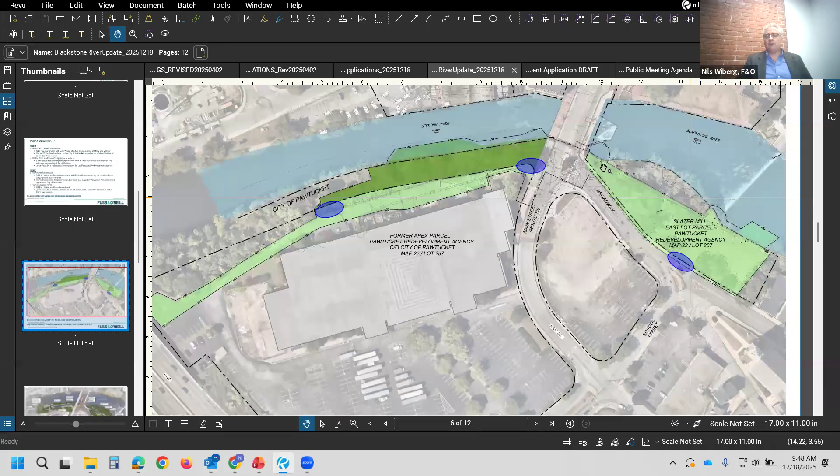The gray parcel of land at the east lot on the river - who owns that? This is actually part of the Slater Mill East lot, but it's not within the limit of disturbance. We're not proposing any activity here, so we're not going to request an easement for access in this area of the site.

Any questions on the easement? This is Kate - is this the entire limit of disturbance we're proposing for the project, or just where the easements are?

This is the entire limit of disturbance. This black line is the actual limit of disturbance line - let me see if I can zoom in.

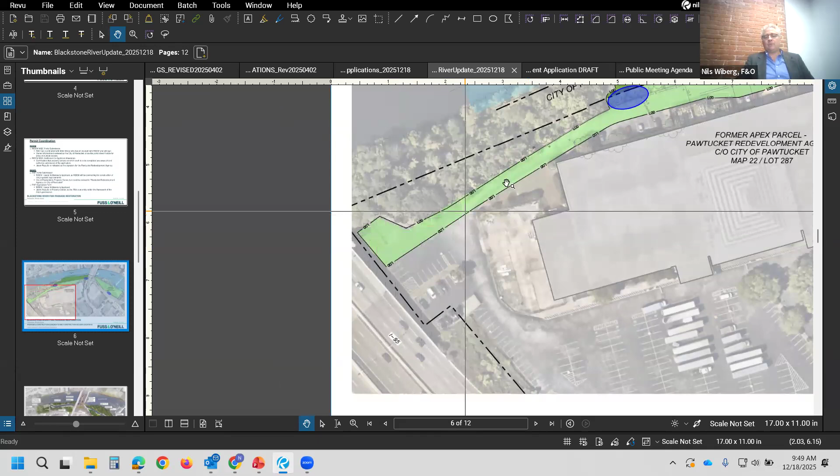PRA was very concerned about the area of the footprint for construction access and staging. We do need an area where we can put a trailer for the contractor and the engineer, in a corridor here. But we really narrowed down the footprint to a very limited area for construction of the fishway. This area is less constrained, but when you get through the fishway, the entire site will be disturbed through the period of construction.

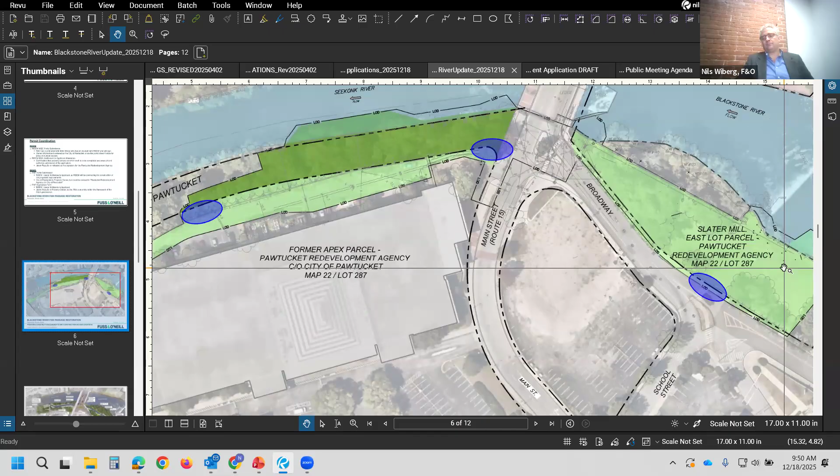How wide is that access from the staging area? I believe it's 30 feet.

Could you do a narrower access if PRA really blocks there? Of course, that's part of the conversation. Their request for proposals has just recently gone out, so they don't have specific plans yet. When they engage with a developer, the developer will have more specific improvements in mind in terms of land areas it would like to make available, vertical structures, other uses, and the timelines for those uses will refine what areas are available and when and how, so we can dovetail and avoid or minimize any potential conflicts with their project's goals.

Their question is, when is your project going to be constructed? We have goals for when it will be constructed based upon when permits will be issued and the availability of funding for construction. But we've indicated to them that probably the earliest construction could begin would be the end of '27, and it would be a 6 to 9 month project to build this infrastructure at minimum.

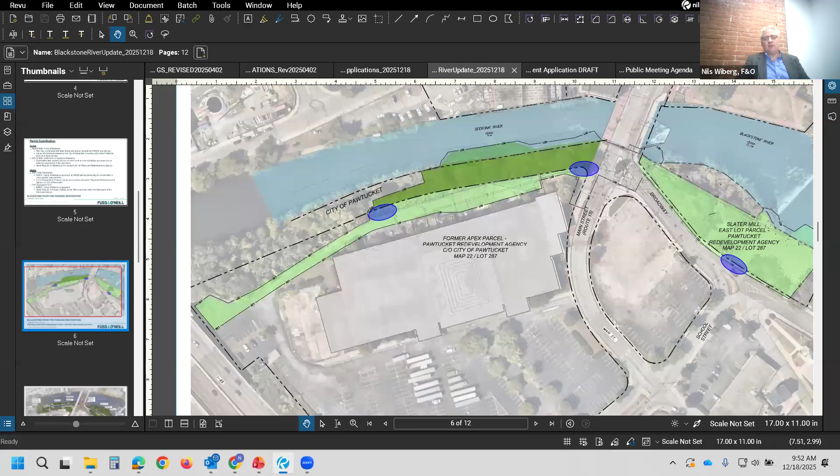We do not - that's not part of our scope of work right now. I believe that TNC may have funding for the purposes of developing these easements. If that's the case, we would go into those particulars and work with Matt and other fisheries staff and Patrick to get more specific about where RIDEM will want access to respective portions of the fishway, where they would get that access, and at what times of year. So I do believe the post-construction O&M footprint for the easement will be smaller and more specific than the construction phase footprint.

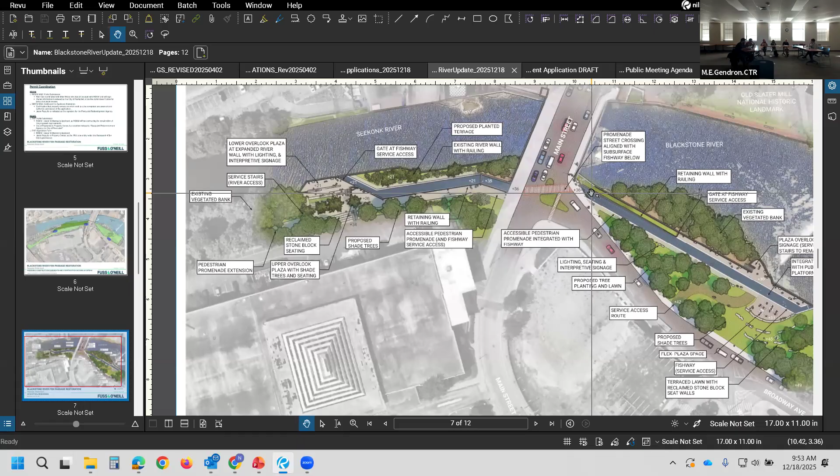So do we have a timeline for requesting those easements? I don't know, John, do you want to speak to what TNC envisions for that, or perhaps Jay? I have no timeline on this - I think we're just continuing to work with PRA and try to get concurrence that these easements will have potential. Jason, do you have any input? No, nothing to add. It's just tough to know right now.

Could that be something we elevate a little bit, so that in January, once PRA knows their contractors, that could be the time where we feel really confident in what we're asking for, so we can make sure that fits in with that work from the beginning?

Sure, if that was to me, maybe I'm misunderstanding. I thought the question was whether we knew when we would start needing these access sites and things like that, but maybe that's not what you meant. I apologize if I misunderstood the question.

I'm just wondering when we can draft, sign, and secure these easements for the project, since I know we can't do it without the easements, and PRA has had the questions of what do you really need in terms of construction, what do you really need in terms of permanent easements. So I know they're reviewing their bids now.

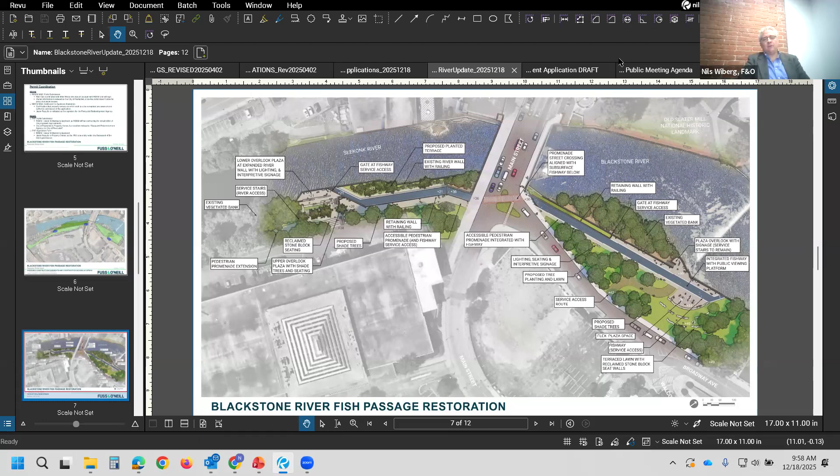Yeah, we can look at reallocating some of the available budget that we can perhaps move to that effort if it becomes a priority. I know, again, we have a budget for the NEPA and Section 106 consultations. If this is something that is a higher priority, then maybe we can shift things there. We also have time here for attendance at these types of meetings, and if we want to try to shift some budget, we can look at doing that.

Certainly want to do everything that we can. And I think there's a certain amount of general sharpening of the pencil to be more specific in an informal sense, but when it comes down to drafting the legal language and the metes and bounds, and having a professional licensed surveyor involved to develop these legal documents, that's something we'd need to look at more closely to see what the level of effort would be and who those professionals and legal advisors would be, to allow us to provide something that could eventually be executed and filed with the town's property records.

So once the dust settles and we get this coming into the new year, the permits are submitted, we'll kind of look and see where we are. And John, we'll set up a meeting with you and Scott and Jason to kind of reorient where we want to focus our resources.

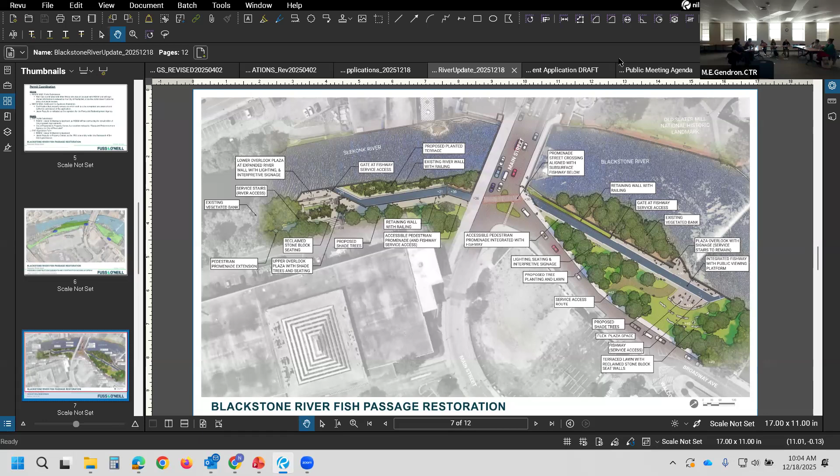To the permanent easement, based upon the graphics we've been showing them, it's almost implied - this is where we want to walk, this is where we want to move. I just wouldn't make that assumption. Let's draw a line around it instead of implying it, explicitly stated. Well, this is the line that's been drawn, so I don't think there's anything ambiguous about this graphic in terms of where the limit of work is and where we want to be on each of these properties.

But certainly having those meetings and answering those questions and continuing the process is very important, so I think we can all agree on that.

And then also a point for today's meeting about signing the application forms: just be clear to them that you're asking for permission to apply for a permit. They're not signing a permit, it's just a permit application. Because sometimes people hear permit and they think permission. True, fair.

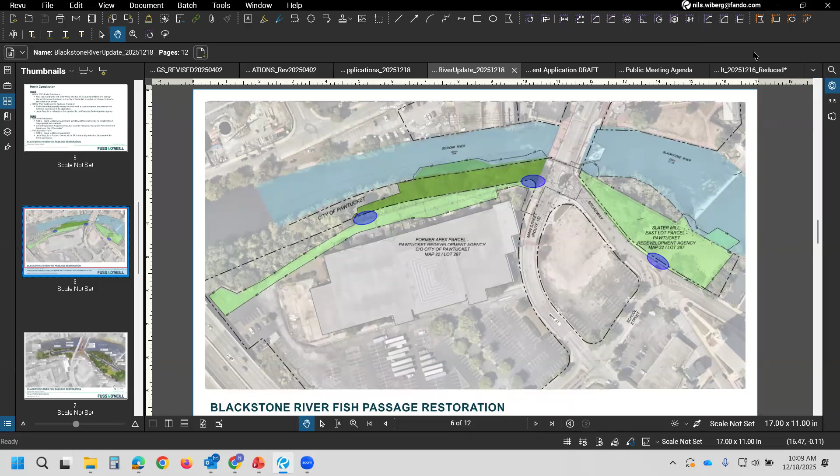I don't know if that meeting happened yet, Jason. Yeah, I can definitely update on that. I didn't know if Sean wanted to offer anything first on the alternatives - there might not be an update there, but anything from you first, Sean?

I don't know, Nils. If you want to jump in, but yeah, I was gonna just put it up on screen. Sorry to interrupt. You and I talked about getting this up, and we can just kind of give an update if that's where you'd like to start, Jason.

Do you want me to pull it open? I got it up right now. Okay, yeah, that sounds good. We can touch on your meeting with Mr. Yip after this.

This is work Sean and Katie have done over the last couple months on the materials and analyses. I wanted to do a page turn here. This report is still being reviewed by PNC and RIDOT, so we'll work with them over the next couple weeks into early January. Then we'll provide a copy for wider distribution to allow others to review, ask questions, and provide input before the report is wrapped up. We have a schedule to complete this report by mid-January.

So we'll want to think about when to re-engage in that second week of January for additional meetings, review and discussion. For purposes of the analyses Sean noted - the considerations, the criteria, the hydraulics governing the 9 alternatives from the last meeting - I think everything in the report falls in line with those. We're just further elucidating the considerations and factors that guide what is being recommended as the preferred alternative.

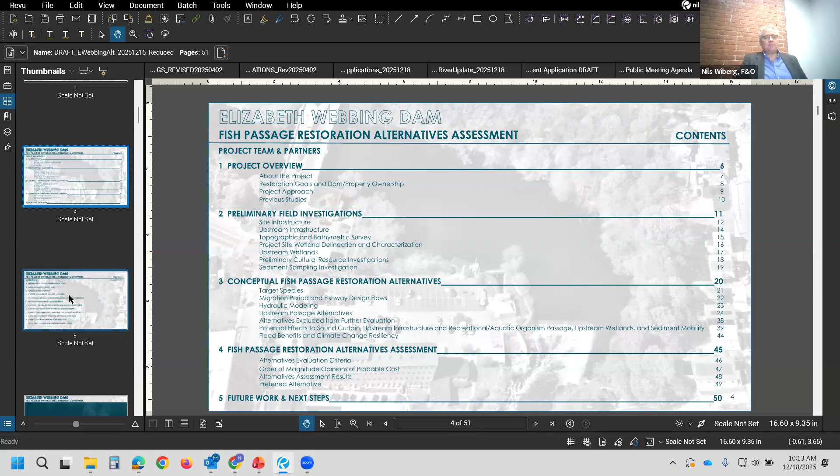That sets the framework and foundation for the evaluations of the different alternatives between the target species, the hydraulics, and where other considerations come in. I'll take a page turn here over the next 5 or 10 minutes, and if folks have questions, let us know. There are additional materials as attachments - this is set up as a graphical report to make it more accessible to...

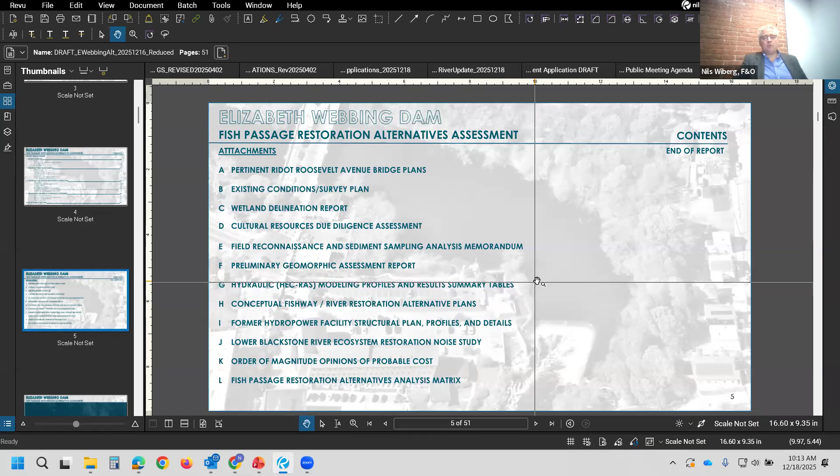Can I interrupt you for one second? Sorry. Can you make your screen presentation mode so it's a little bit bigger for us, please? Let me make it full screen.

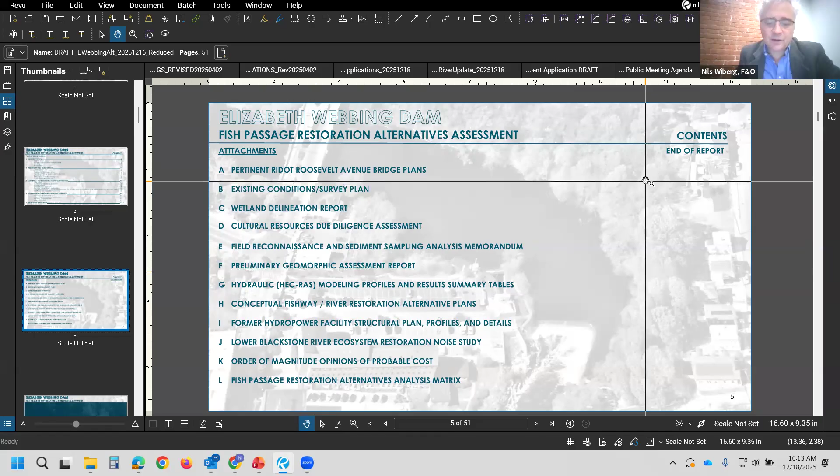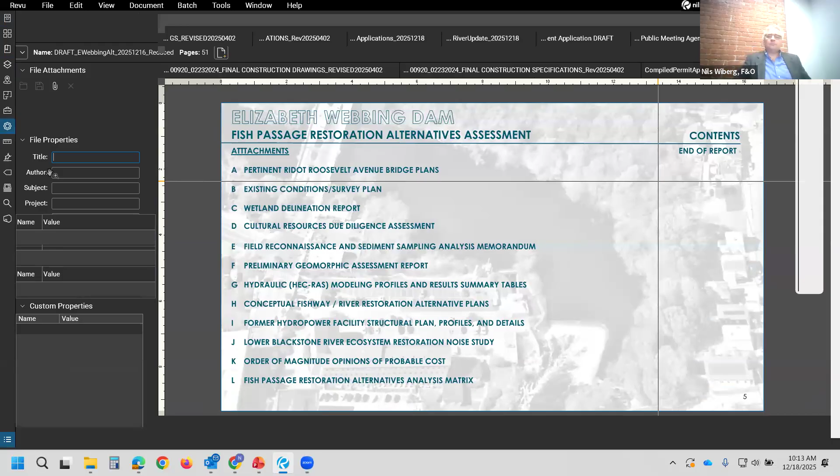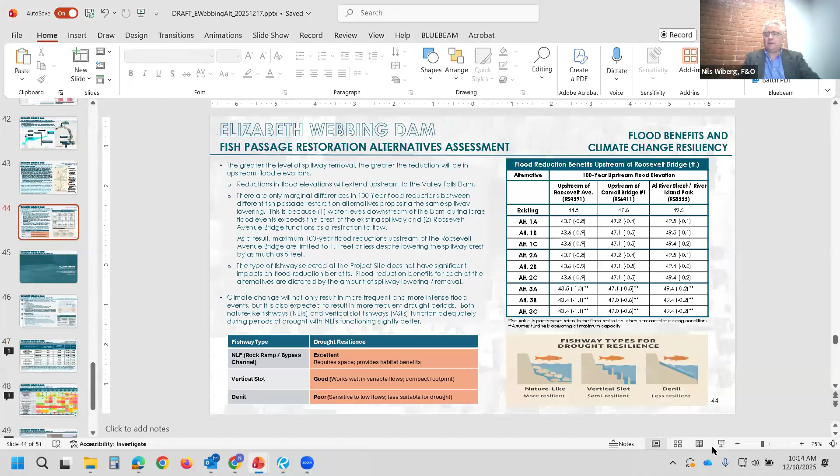You see it, press F11. I'm gonna make sure I don't... Sorry, I forget it's a different program, so it's not as easy as just pressing present. You know what, I actually have it up on PowerPoint here, so I'll just go into presentation mode. All right, let me do that now - that'll be a little bit easier. Thank you so much.

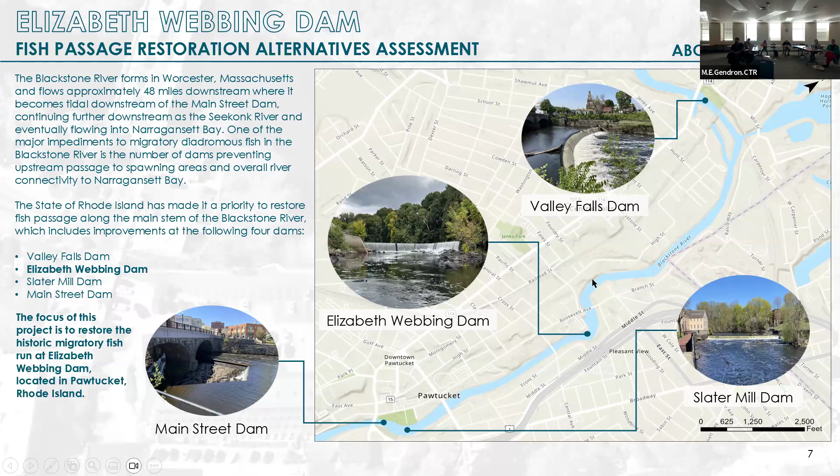Sean, you've done all the work putting this together, but if there's anything we see that we want to clarify, by all means. This identifies where the four dams on the river are - the goal and focus of this project - the Elizabeth Webbing Dam, the FERC facility here at the project site, and the goals for restoration of the river itself.

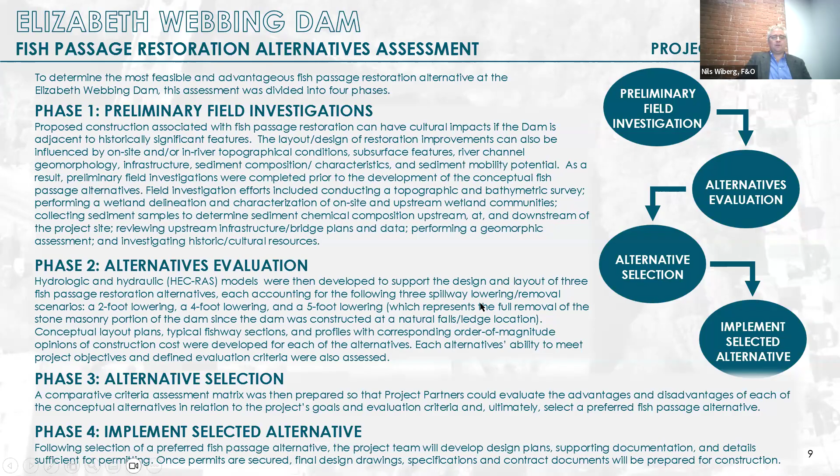The phasing of the project being implemented right now, with the future phase 4 being to implement and permit the preferred alternative. Looking at some previous assessments completed at the site - Army Corps did a study looking at a number of alternatives - and we're building upon these prior efforts. Again noting the recognition of the deed restriction about the dam and the lowering, as we've discussed in previous meetings.

Nils, if you don't mind going back to that slide—that question did come up about full dam removal, so I think it was important to bold that bottom line there. I wanted to bring that up because it was a specific question last time.

Apparently there is a deed generated as part of the redevelopment of the mill complex that prohibits complete dam removal. Even though one of our alternatives looks at pretty much a 5-foot removal, essentially the complete removal of the man-made portion of that dam—since it was built on a natural falls location—I just wanted to highlight that full removal seems to be a deed restriction right now.

Can I ask a clarifying question? It was my understanding that the deed restriction was a 2-foot lowering and didn't say anything about dam removal—are those the same thing or two separate things? I took this directly from a document shown on the top right, and that document said it prohibits complete dam removal. I'm fully aware there's a 2-foot lowering, which is why that's our first alternative. I don't know if Jason or John know completely—one of our next steps is probably to do deed research to see exactly what that restriction is. Right now that statement in quotes is from a document put out in 2018 by EMRRP.

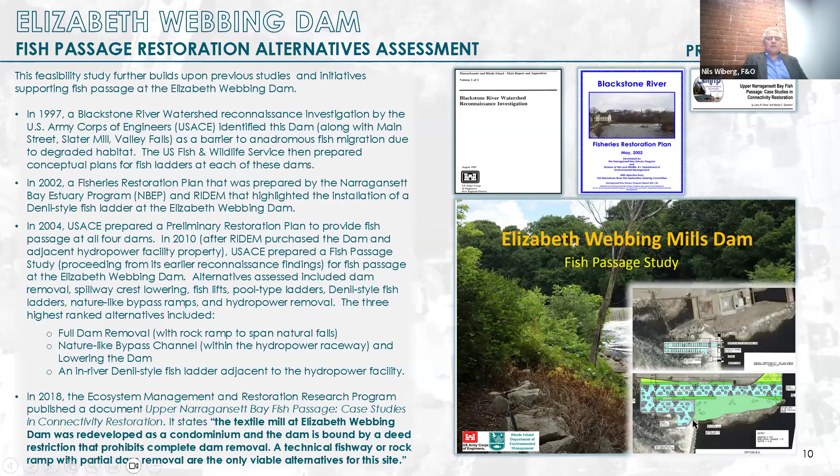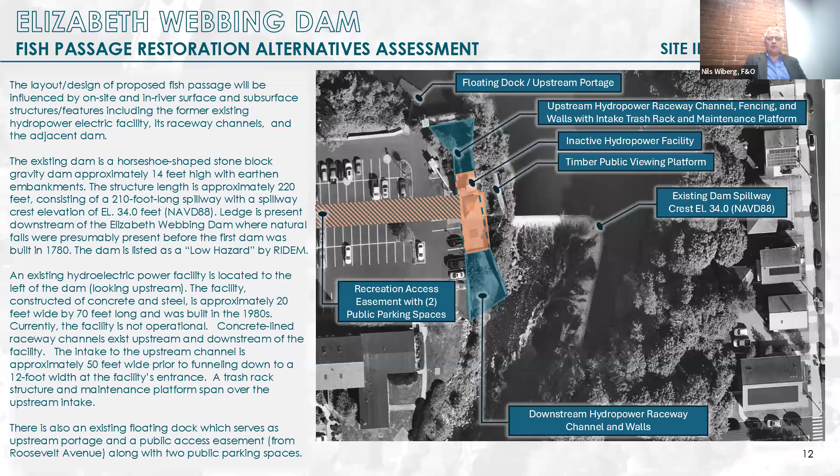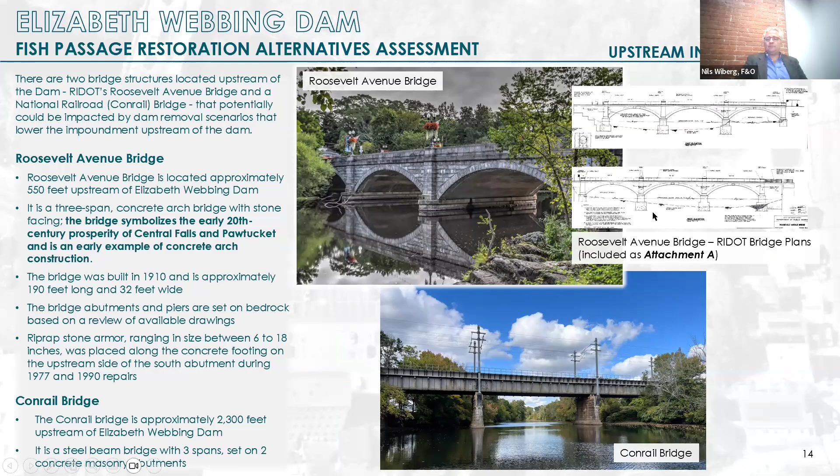I'll keep going in the interest of time. Leading into the field work that was done, we got a survey of different portions of the site, evaluated and inspected the facility in terms of its construction and where the bedrock is shown, with a couple of profiles depicting that. This gives a perspective on existing conditions at the site in different areas, including the Conrail and Roosevelt Avenue bridges, which are hydraulic choke points that Sean can clarify in terms of the different alternatives. We also have mapping received from DOT indicating the presence and construction of the foundations for these structures.

This is a general map of the topographic survey and bathymetric surveys completed at the site, also attached as a base map plan that's been developed.

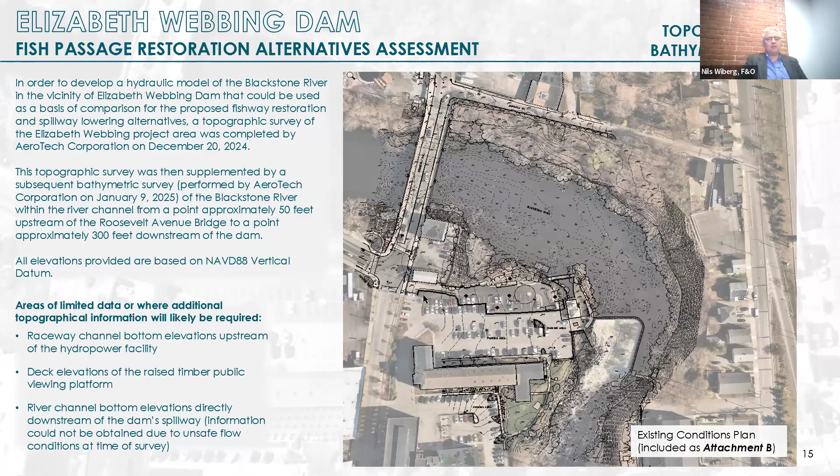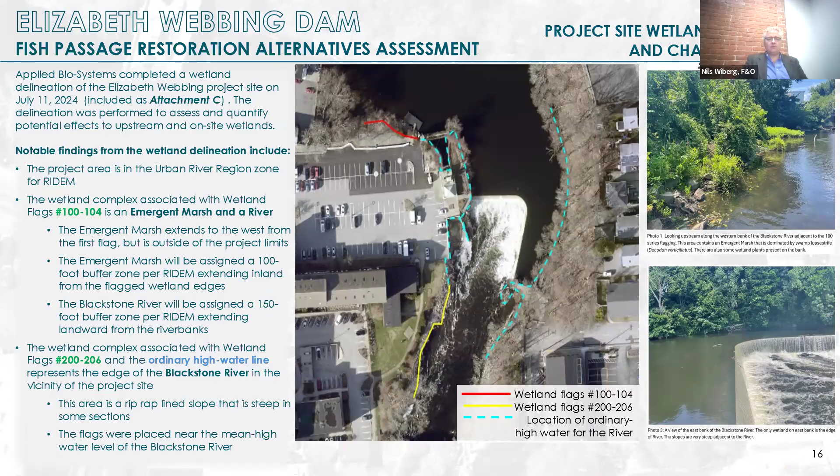This shows the delineations of the site and the different types of wetlands flagged and mapped, along with the presence of ordinary high water, and RIGIS and National Wetlands Inventory mapping continuing upstream through the two bridges. This ties into the assessment of potential changes to these wetland habitats based on the different dam lowering alternatives.

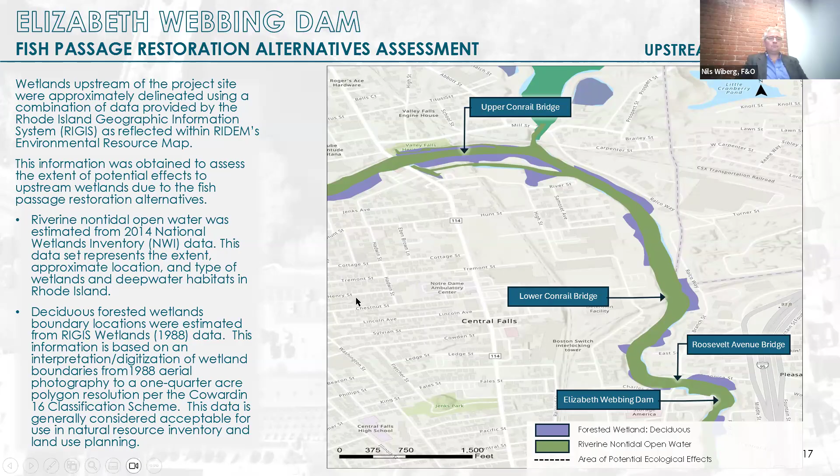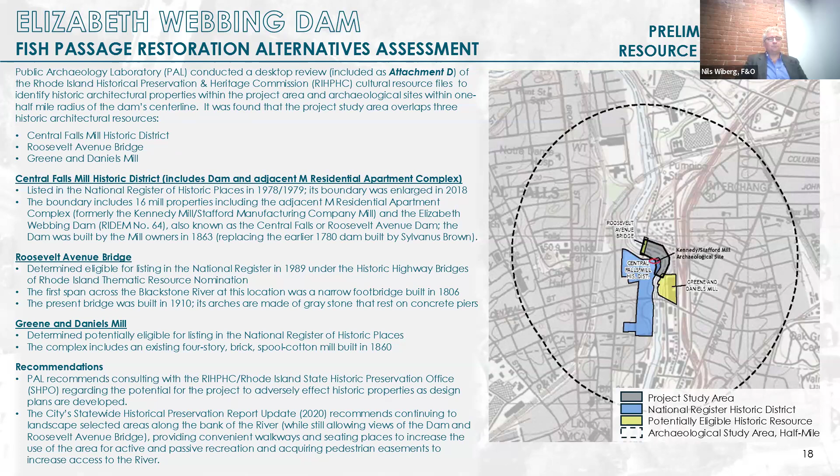This is the cultural assessment of the site that PAL completed, showing the area of study developed as part of this project, noting the historic district adjacent to the site and a potentially eligible area at the Greene and Daniels Mill, along with recommended consultations.

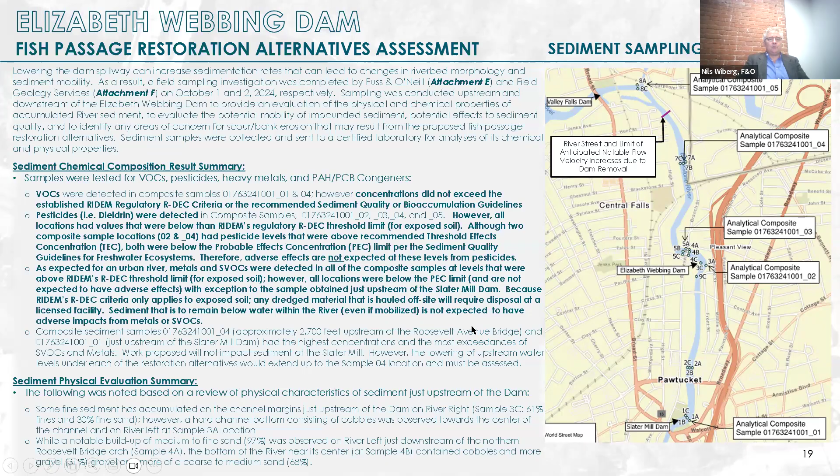Here we get into the sediment testing program—where samples were taken and what the results were. We got reference samples at both upstream and downstream locations, downstream being at the Slater Mill Dam. I won't go into the weeds of the results, but they're characteristic of what you'd expect in the Blackstone River.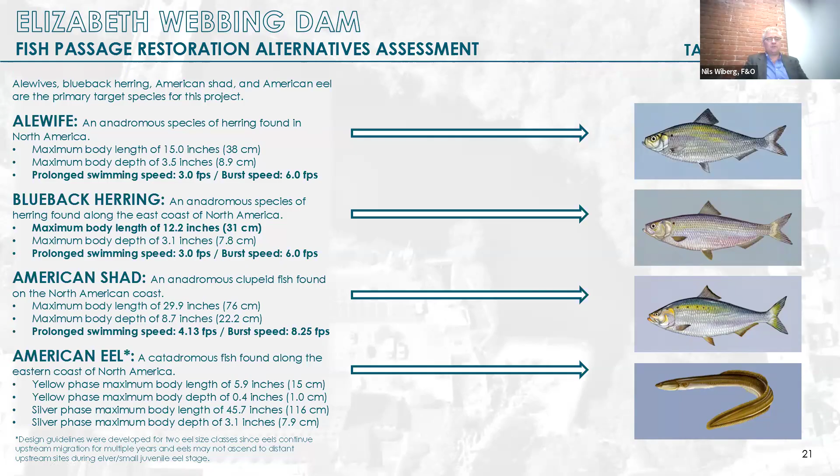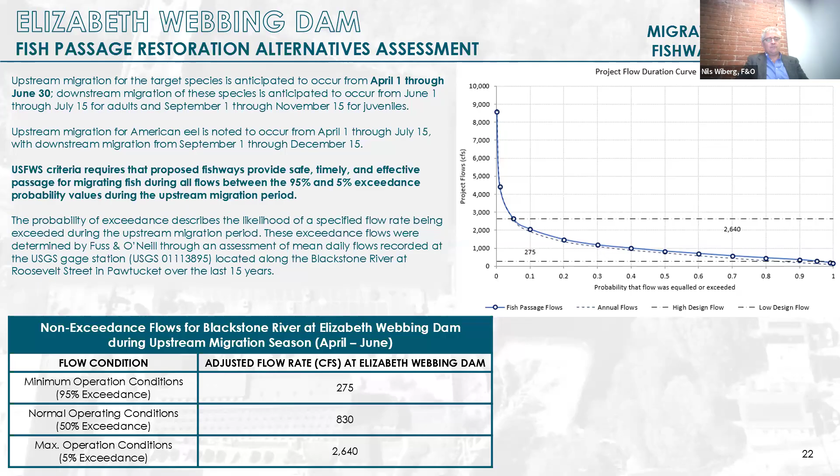Moving into the target species, their characteristics and swimming capabilities that guide the evaluation of the alternatives, we looked at hydrology from the gauge stations at the site, identifying upstream migration period flows for the 95, 50, and 5% exceedance levels.

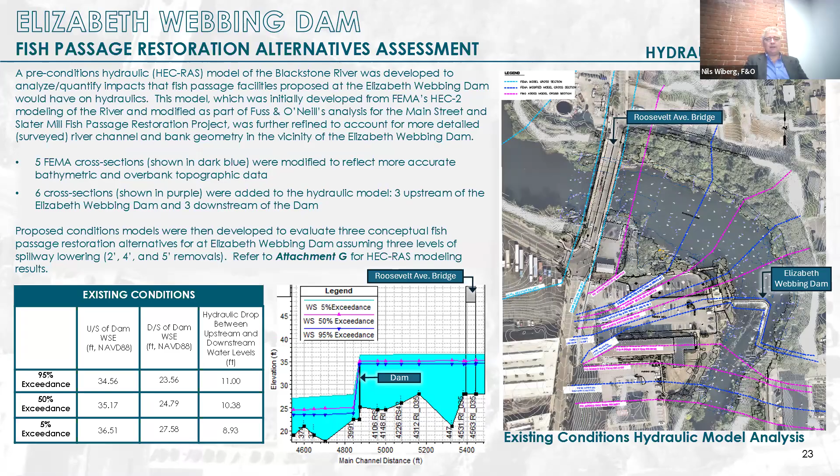For hydraulic modeling, we developed a base conditions hydraulic model of site conditions and calibrated that model for the evaluations themselves.

This is all part of what we discussed last week. Sean developed a couple of graphics to depict what a vertical fishway or a nature-like fishway might look like, corresponding to the alternatives developed in the previous meeting.

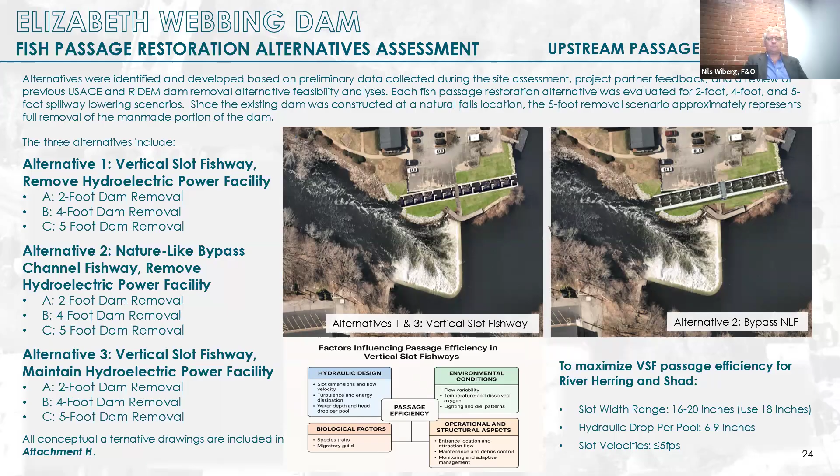Again, I won't spend a lot of time going through this because we went through this last time. But just documenting the characteristics and metrics for the alternatives here for the vertical slot fishway under a 2-foot dam removal.

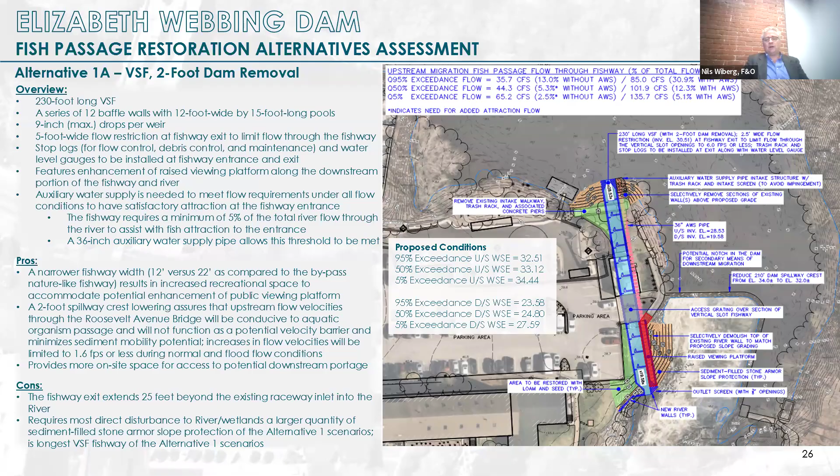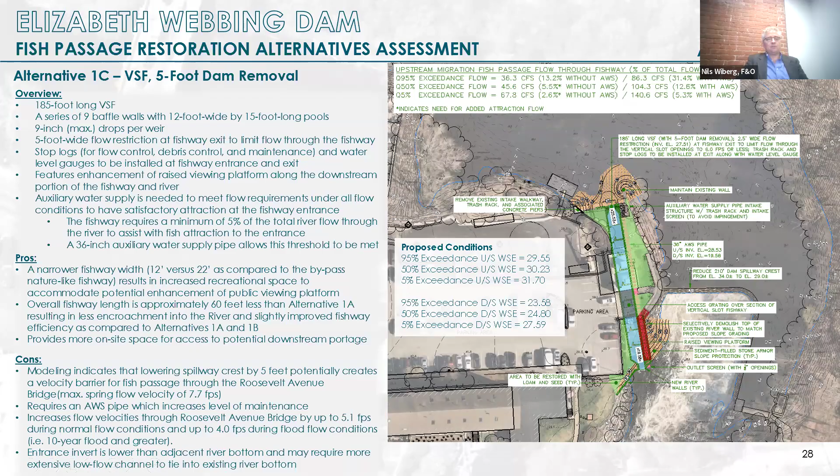Obviously a longer length, a greater head pond drop for 2 foot. As you go through to the 4 foot and 5 foot dam removal, the fishway gets incrementally shorter. But that's all tied to what happens when you start to lower the impoundment, you start to increase velocity through the Roosevelt Avenue Bridge, and that becomes a potential hydraulic barrier for each of these alternatives under those 5 foot or perhaps 4 foot removals that we can clarify.

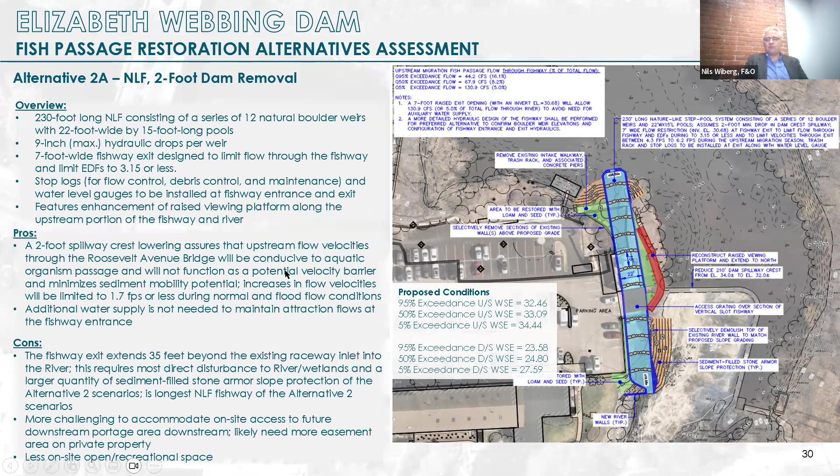Again, the alternative 2A corresponding to the general layout for the power canal for the construction of these alternatives. And as the head pond drop goes down to 5 foot, the fishway itself becomes shorter.

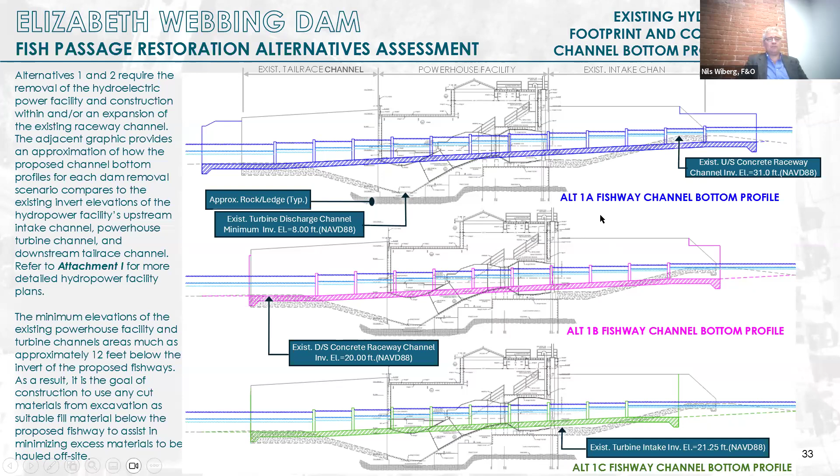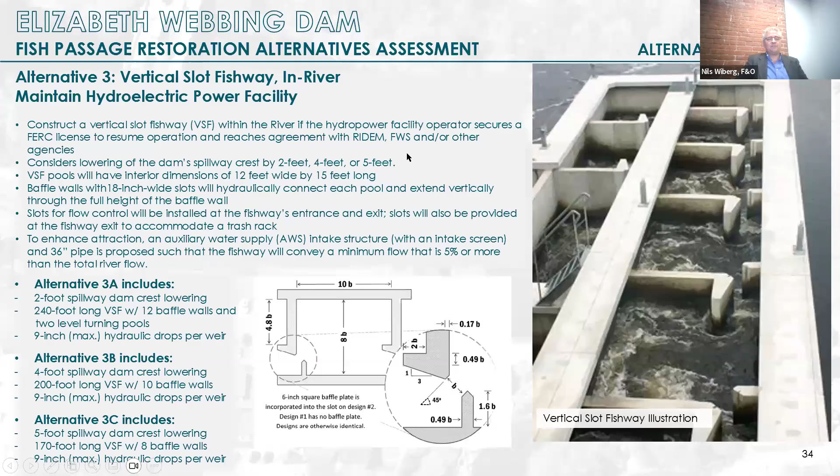Alternative 3 is the one that assumes maintenance or continuing hydropower facility operations here, if the FERC license were to be granted. Just showing the layout here with a turn back for the exit.

And then as the dam removal increases, you get into a scenario where you can avoid the fold back and just have an aligned linear fishway within the river channel itself.

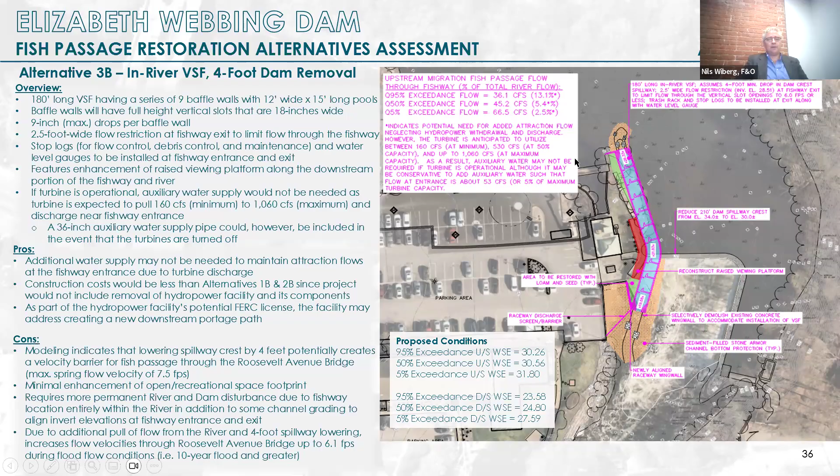Again, as you get down further, you start to get into issues with the entrance or exit channel, as well as the entrance channel, as the fishway becomes shorter within the river.

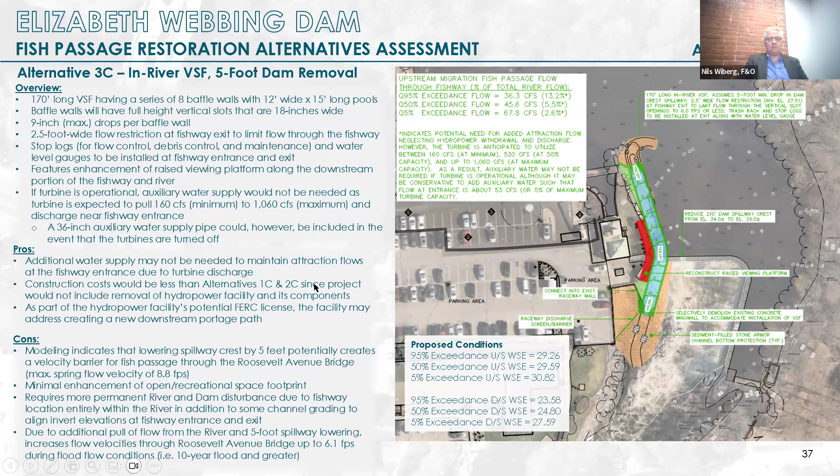This would obviously entail a lot of design considerations with flow confusion and attraction at the hydropower facility outlet. So that would be another set of design issues that we'd have to work through for this alternative.

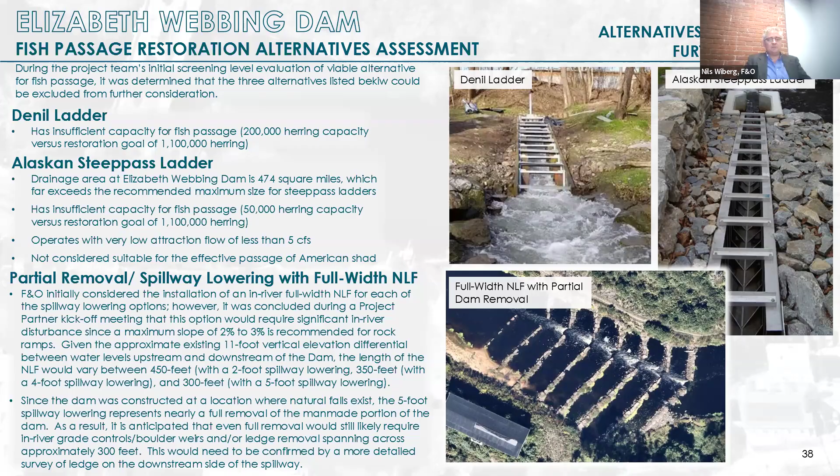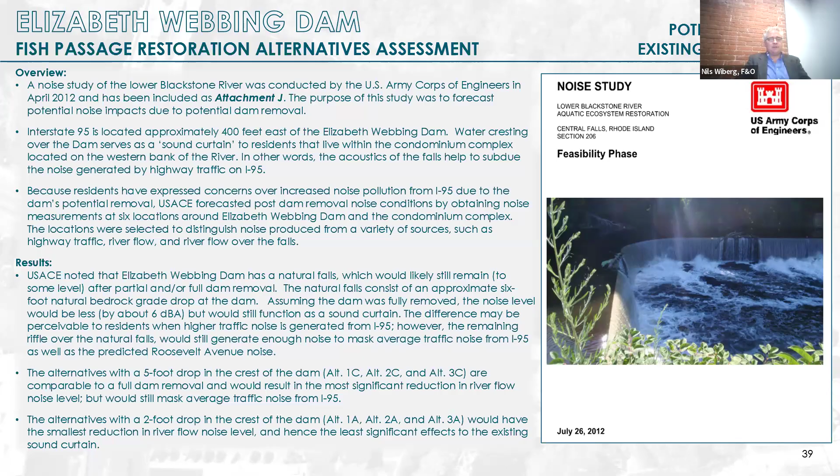These are just laying out some of the alternatives that were identified but not further evaluated, just in terms of feasibility. And looking at some of these considerations with regard to the noise study that was performed, and sound levels associated with the different alternatives and the different dam removal lowerings.

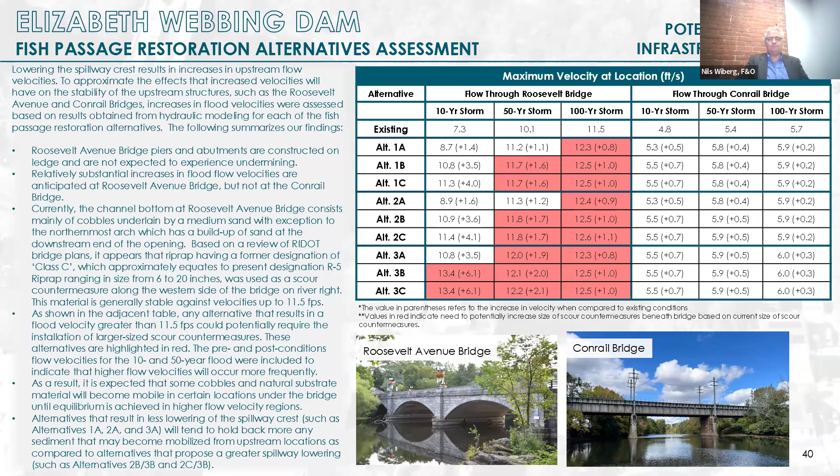Again, just looking at the velocities during the migration periods at the Roosevelt Avenue Bridge for these different lowerings. And Sean, do you want to just try to outline your evaluation here quickly?

Yeah, so basically all this was just plugging in a little bit, clearly once you start to exceed the prolonged speed of the target species, which is about 3 feet per second, the fish need to tap into their energy a little bit more.

So it was just plugging into a calculator if we want them to get through the Roosevelt Avenue Bridge. We only really looked at that location because that really was the location that popped up as being the location of the greatest velocities, the restriction on flow through the river currently.

So it's just a matter of plugging that in, seeing how far can you expect river herring to swim at a speed where they have to get through 50 feet. So that velocity through this calculator worked out to be about 4.5 to 5 feet per second. So that's kind of what we looked at.

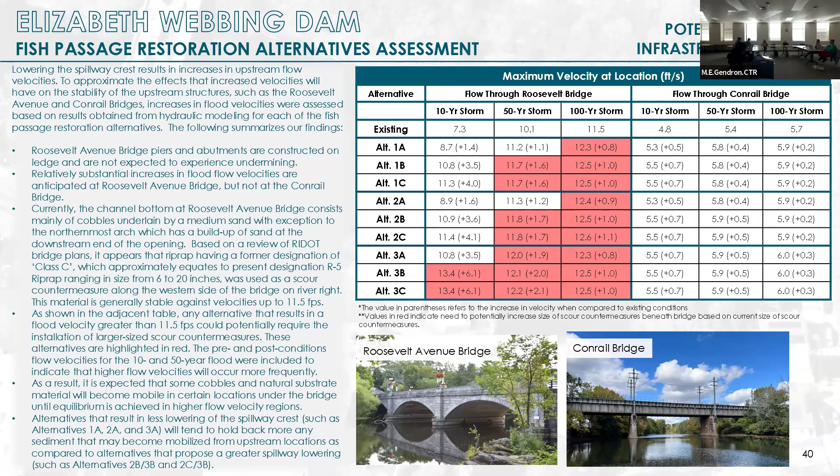So the previous slide referenced the 100-year flood and the 50-year flood in relation to scour. What flood did you consider for that? Oh, I see, 100-year and 50-year storms. But then the next slide when you're talking about fish passage only, did you use specific storms or what flow?

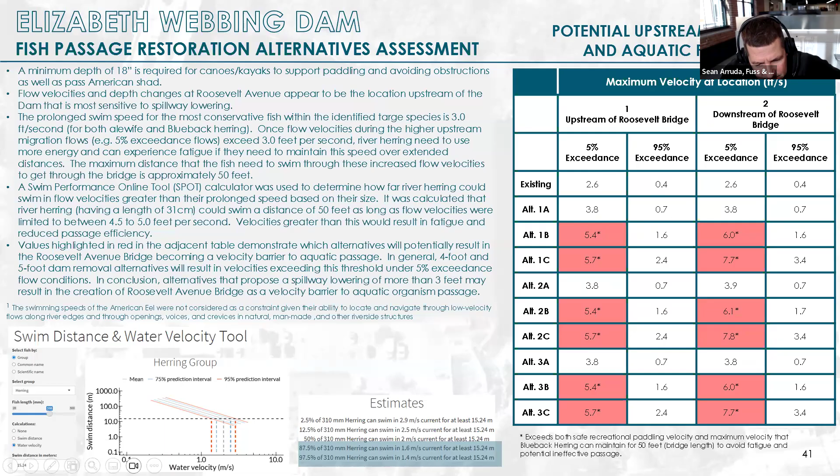What you use is typical flow, the 5% and 95% exceedances. Can you explain that from an upstream migration standpoint? It's just typical practice that when you design your fishways, or assess fish passage for effectiveness, you're looking at the 5%, the 95%, and the 50% exceedances. That's generally your range of flow during the upstream migration season, which here is from April 1st through June 30th. We look at just the last 15 years or so of that data to be a little more accurate in terms of climate change. That's standard.

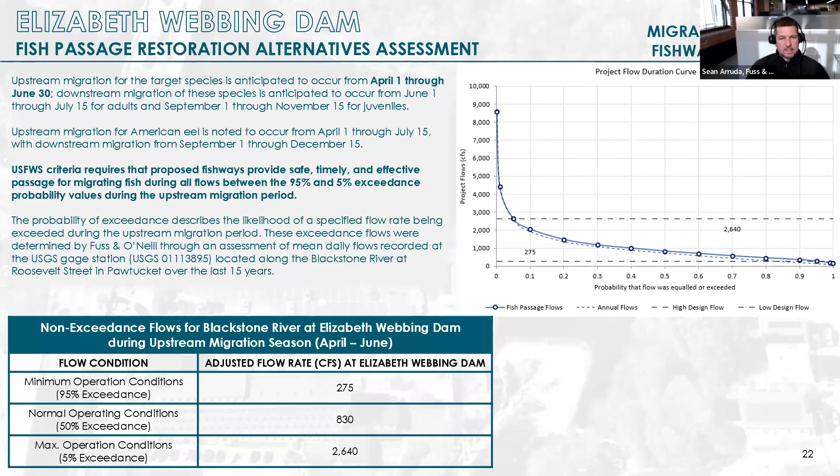I'm getting hung up on the word exceedance because I don't use it in my day-to-day. A 5% exceedance is good, and a 95% exceedance is really tough - this is just in terms of flows, it has nothing to do with passage efficiency. It's just actual flow. So a 5% exceedance means that only 5% of the time during the upstream migration period will flows exceed that value - that's basically the high range of what we design our fish passage for. And the 95% exceedance means 95% of the time in the spring the flows are higher than this value, so that's your low value.

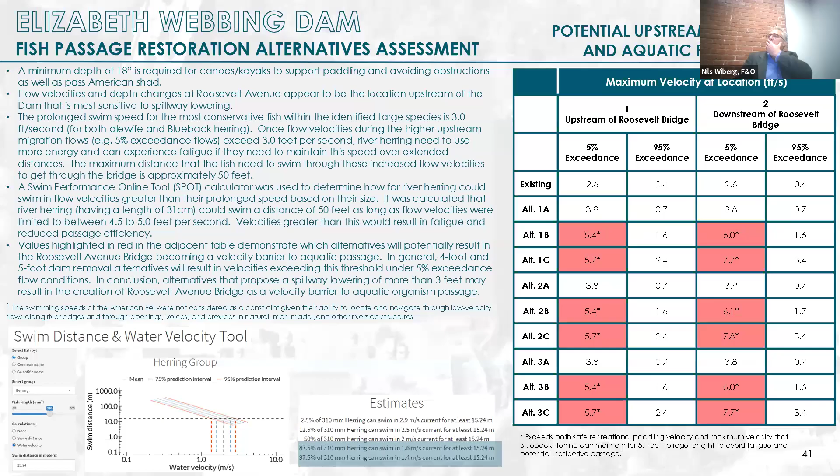So with that in mind, can you go back to that other slide? Because I didn't understand what exceedance really meant. Okay, hold on, let me just go back to that one. Sorry about that, bear with me here. Sorry everybody, in case you're all experts, I just didn't really follow. But this makes more sense now.

So at the lower flow periods, that's not a problem for the fish. Generally the lower flow periods you're going to see are starting towards the tail end of the upstream migration season, as you approach that low flow season in July, so there's no problems there. It's only during the higher spring flows that you're going to start to see the velocities in the river, at least through the bridge, result in velocities where the fish are going to have to tap into more energy since their prolonged speed is only about 3 feet per second.

That's outlining like a little bit of a red flag - as we start taking that dam down more, once you start removing it 3 feet or more, you're starting to look at velocities approaching or exceeding that threshold value, where we may need to consider looking into the actual geometry under that bridge in more detail and potentially proposing improvements if needed.

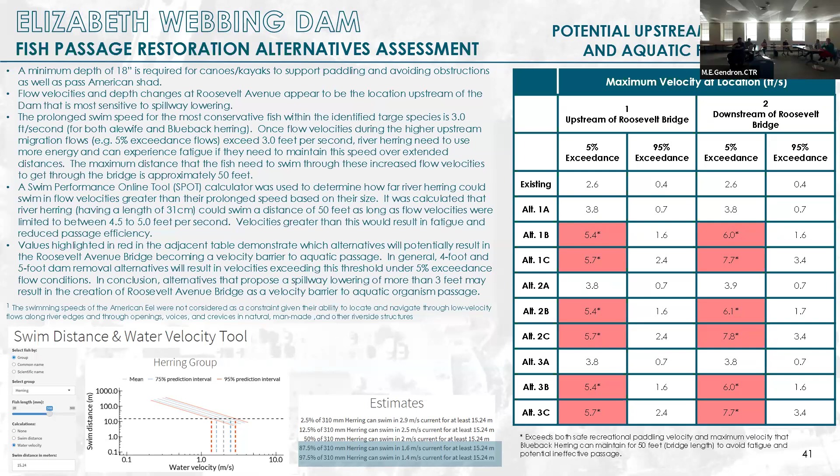So Sean, when you're looking at those, the 5% exceedance means it doesn't get this high very often, but it gets this high sometimes. That does seem to correlate with spring flows, which is the time when fish are migrating as well? Yes, this is all based on the upstream migration season, so it's narrowed down to when the migration season is, not throughout the year. Correct - in this case I'm only worried about the higher spring flows and getting the upstream migrants through there.

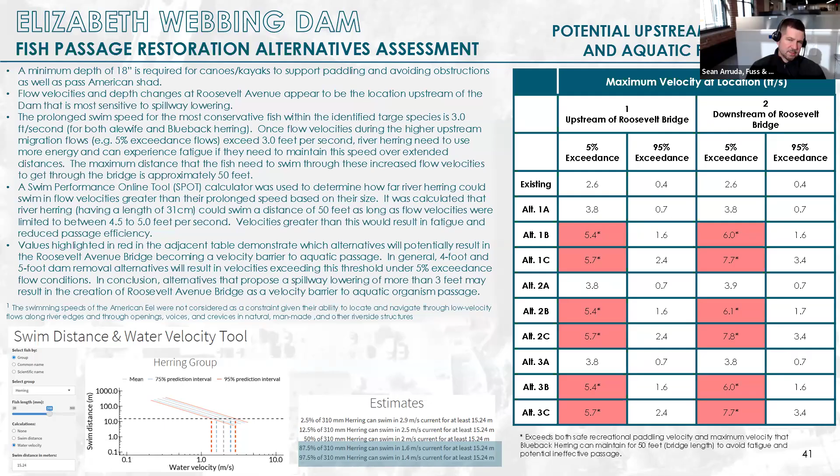I'll add one last thing - the other thing I also look at is that entire river section, for instance from Valley Falls Dam all the way down through the Elizabeth Webbing Dam, just to see what the hydraulics are through the river and what the velocities are through there now. I think the greatest velocity I was seeing was somewhere in between the lower and the upper Conrail Bridge - that's where the slope of the river starts to increase a little bit.

But even at the highest point right now, the greatest velocity during the upstream migration season, not flood flows, was probably around 4.87, so maybe 4.9-ish right now.

That's about the greatest velocity I was seeing under existing conditions in this whole section from Elizabeth Webbing up to the next dam, Valley Falls, which is still conducive to passage. It's really just getting a feel for the river here and what I know from fish passage. Once we start getting to that 5 feet per second, now we're looking at velocities greater than anywhere in that section of the river that fish would currently be experiencing if they were actually there, active and moving upstream.

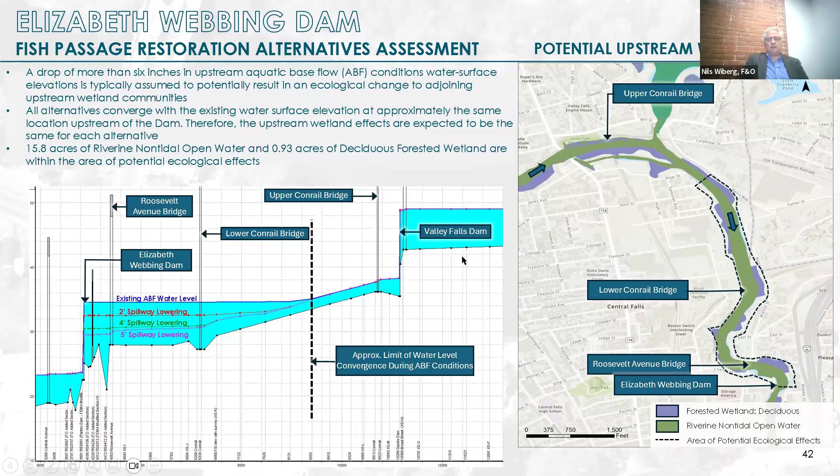This graphic correlates to what Sean was outlining for fish passage considerations, applying these hydraulic profiles you see here on the left to the potential wetland and ecological conversions that might occur upstream. Again, we didn't do a refined analysis of what would happen—we just know where those resources are that might potentially be altered based upon a changed profile, depth of water, extent of inundation, and period of inundation for these different areas.

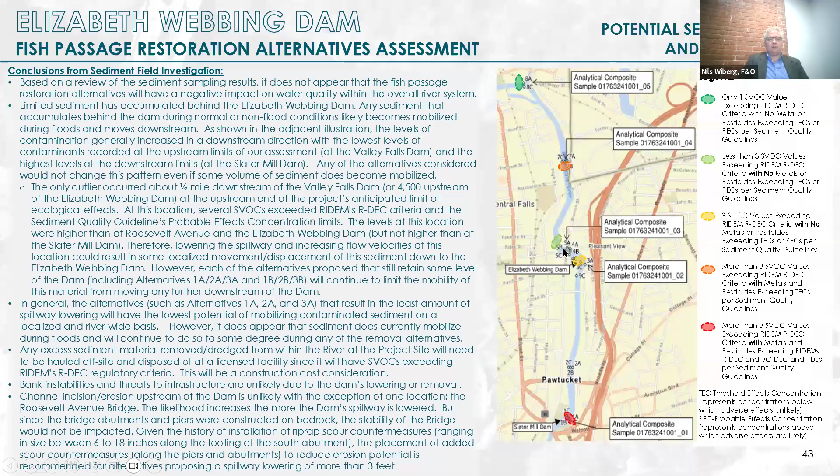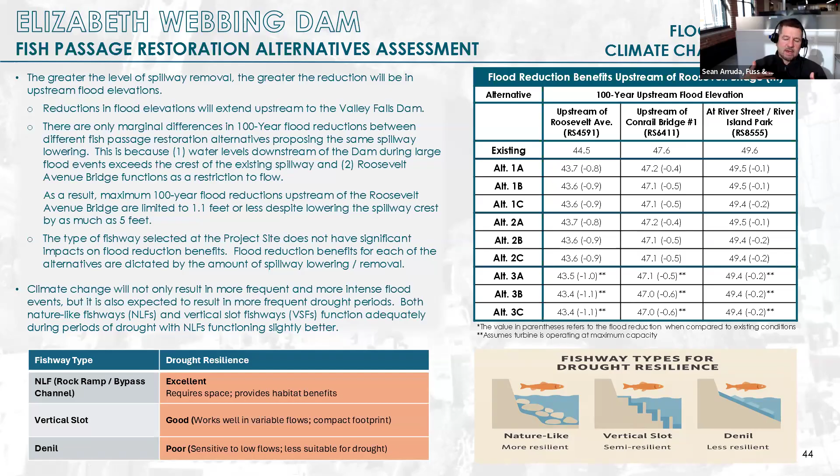Just to add to that—what these values in this chart represent is essentially upstream of Roosevelt Ave. Clearly, anyone can say that if you take out the dam, it's going to drop water levels, which it will, and the biggest impact will be from the dam to Roosevelt Bridge, because the Roosevelt Bridge is actually functioning a bit as a hydraulic restriction. So what I wanted to show is that you have most of your properties upstream of Roosevelt Bridge that would potentially benefit from a lowering of the dam itself.

What this shows is that honestly, for a 4-foot or a 5-foot scenario, there's really not much difference in the flood benefits between the scenarios. A lot of that has to do with Roosevelt Ave functioning somewhat as a hydraulic restriction, as well as the elevation—the channel grade steepens as you move upstream of Roosevelt Ave, so you see a bit less benefit from removing the dam itself.

The takeaway is that for a 10-year storm you're going to see greater reductions, a 50-year a little bit less than the 10-year, and the 100-year—which is what flood insurance is based on, which is why I selected that one—shows that there isn't a major benefit to flood reductions from either of these scenarios when looking at the river channel upstream of Roosevelt Ave.

This also touches on a question that came up regarding drought and resiliency, because climate change not only impacts the intensity and frequency of flood flows, but is also expected to result in drier periods, drought periods.

So I put a few graphics up here showing which types of fishways, and how they generally perform under drought periods. A nature-like fishway is deemed more resilient than the vertical slot, which is semi-resilient, and the vertical slot is obviously better than the previously considered Denil style—which is why that was added here, since I believe the Army Corps options looked at Denils. Considering we've had significant droughts in the past few years, that's such an important consideration, so thank you for bringing that up.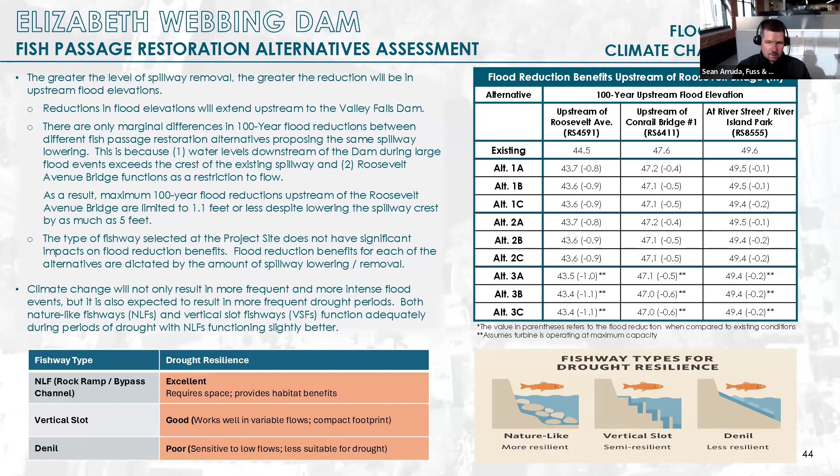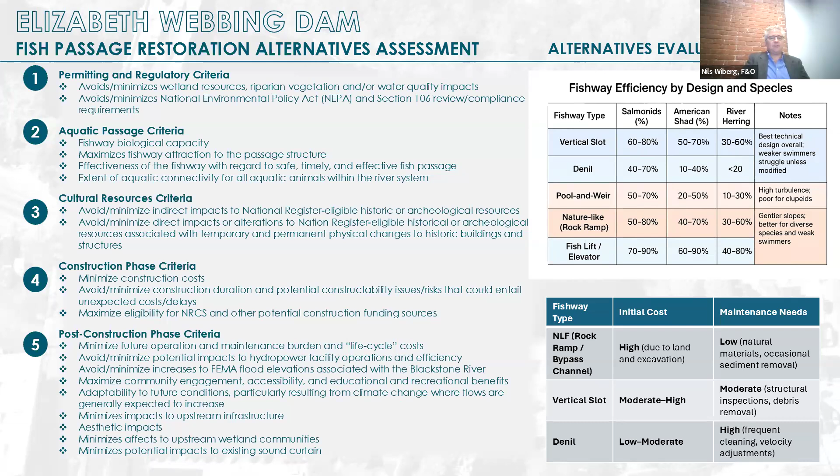All right, this is kind of the last segment of the report in terms of the criteria. Again, we went through these in the last meeting in terms of the different types of criteria and specifically categories we identified, as well as cost and maintenance needs for these. We have criteria for effectiveness of each of these different alternatives, and listing order of magnitude costs associated with them as well.

For the different alternatives, ranging from 5 million for a fishway in the river channel itself, vertical slot, up to 8 million for a nature-like bypass channel within the power canal. Again, these are all based upon projections of a future period of construction and a range, depending on what the market range will be.

So one quick question on that, Nils.

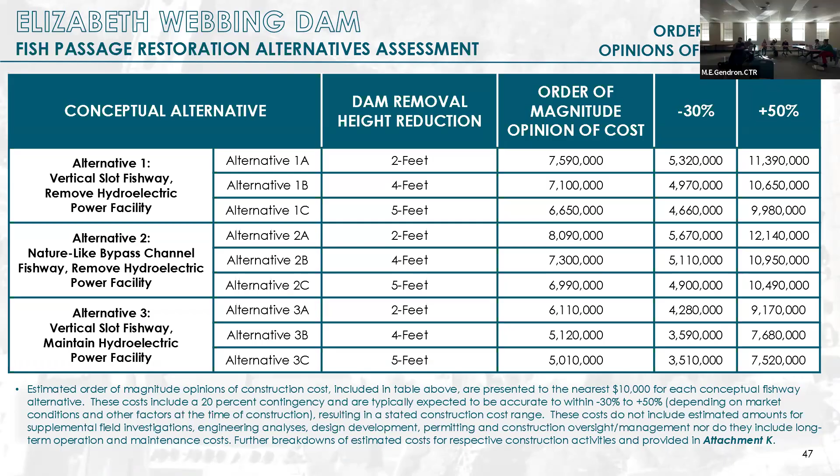It might not be within the scope of what you folks are doing, but is the cost of removing different heights of dams incorporated in that — the cost of providing the fishway plus the cost of removing the dam? Yes, they are. Alternatives one and two are also contingent upon the hydropower facility being removed, so we've included the cost of hydropower removal as well in alternatives one and two. But yeah, all three do include spillway lowering.

We also carried a certain amount, and this will be part of our internal review over the next couple of weeks, for handling and management of sediment that may be encountered. So we're making assumptions about the volume and how it would need to be disposed of, and the cost for that as well.

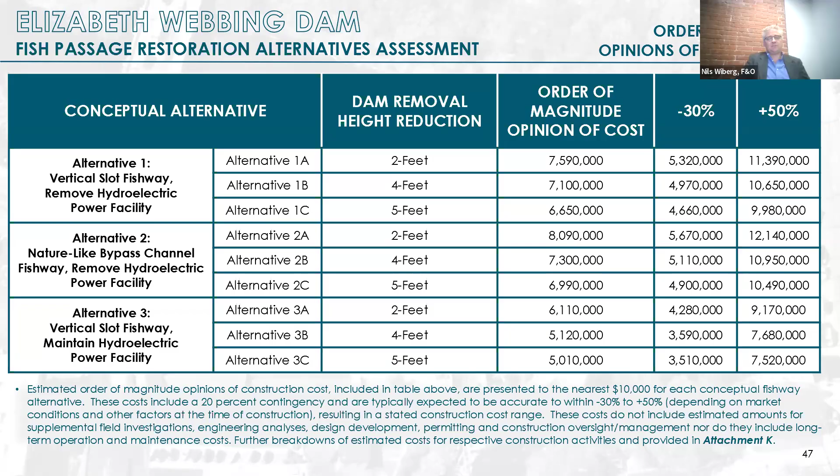It's tough to say, but especially when we looked at some of the profiles of what the bottom of the fishway channel would be in respect to the bottom of the current turbine facility, they go much lower. So anything we're excavating, if we can use it underneath the fishway and bury it, that will be the intent. But any excess materials hauled off site may need to go to a licensed facility, so the assumption is just based on the earth removal quantity that we calculated.

I think we used, I don't know, about 50% on the assumption that whatever is being hauled off, 50% of that value is going to probably be hauled off at a premium price to cover hauling it off to a facility.

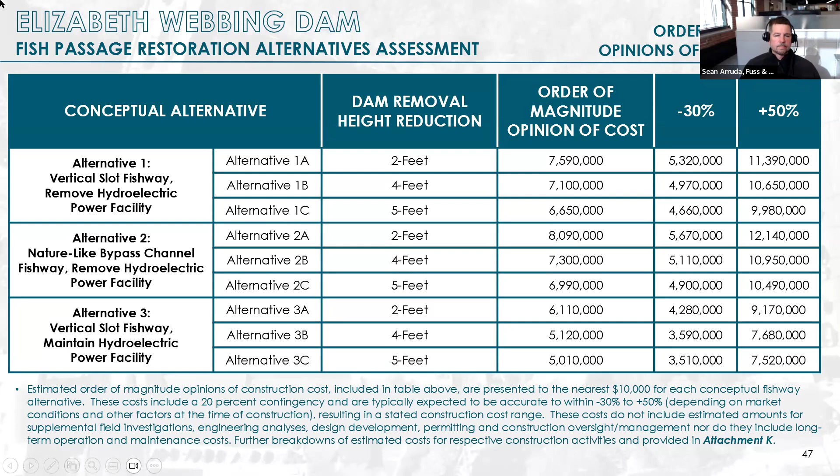Okay, again looking at the alternative right now, based upon the analyses we've completed, alternative 1A-2 with a vertical slot fishway in the power canal and a 2.75 foot drop seems to be what's most advantageous given all the criteria.

So again, this will be something we revisit with Jason and Matt and John, and work through the other internal reviews for this report, and then we'll provide this for wider distribution so folks have a chance to look at it and ask questions as well.

Yeah, I think, just to add, one of the things is that the vertical slot is narrower — it's 12 feet wide versus the Nature-like, which is 22 feet wide.

So one of the things this does do is provide a little more opportunity for open space enhancement over here, because I think that's one of the restoration goals for the city too, in terms of open space area along the river.

So I think this alternative, even though I don't get into detail about restoration, and I know we talked about downstream portage, I think the idea is really to take advantage of some of the open space that's going to be created and enhance that for public usage, kind of like Overmill Overlook Park, just upstream of Roosevelt Ave, taking advantage of open space created with this alternative to enhance public access and usability.

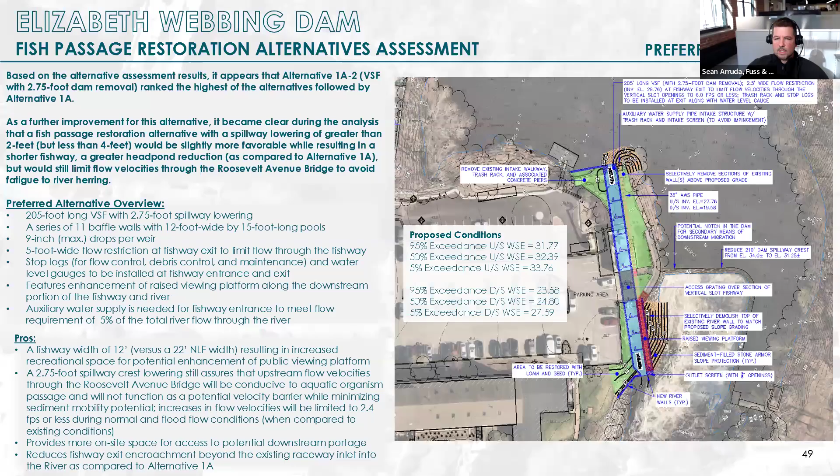So whether we do railings or do a grading, we're definitely going to need to do grading over a portion of this, which I've shown in the gray hatched area, so that we allow access from the parking area, because there's an easement in the condominium complex to allow people to use this park. So we at least need access to the public viewing platform out there now - we definitely need to do that. But there are opportunities if we want another crossing somewhere, if it would be better for portage to put another crossing over it, there's certainly opportunities to do that.

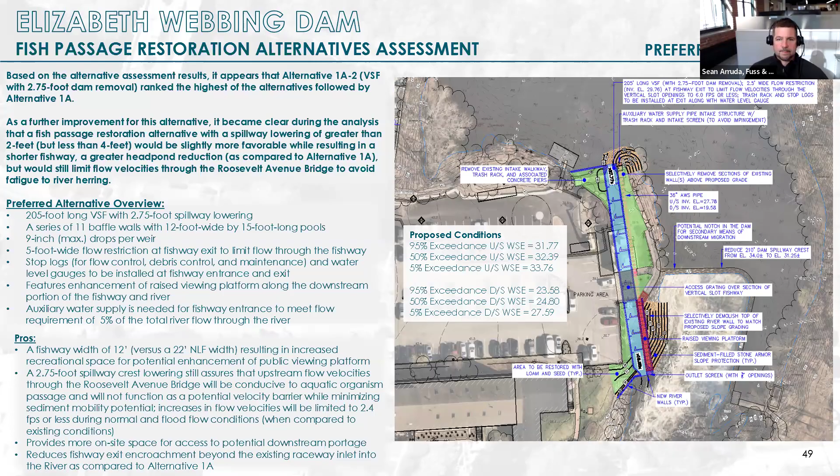Okay, and that brings us to the last slide, which is really just the next steps - again just refining the preferred alternative, whether it stays as this one here. This is just where Fuss and O'Neill's evaluation has landed, but we want to take time to look at these more closely, and then we'll be making some additional revisions to this report based on internal review, and we'll provide a copy out for folks to review themselves.

So I guess that's it. We're getting close to the end of the time. I'll take any questions folks have. I do have to sign off at 11 o'clock, but I don't know, Sean, you could probably stay on if folks want to look at things more closely.

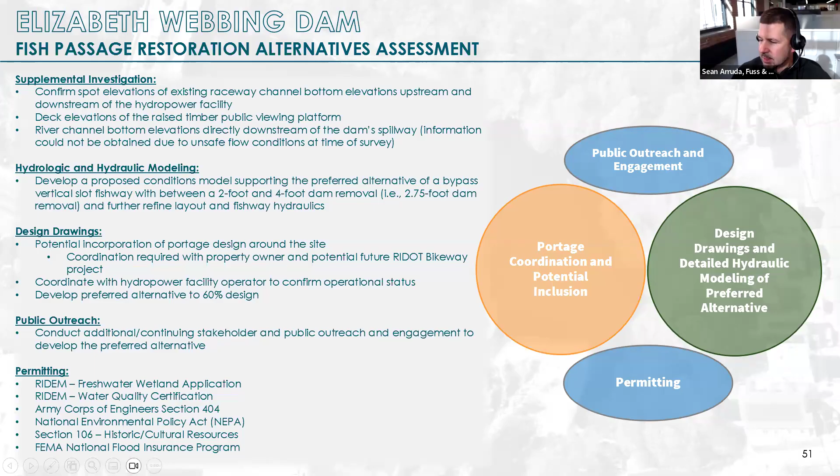I actually might have a construction meeting at 11. We have to jump at 11 too, because someone's using this room.

Just an observation that RIDEM wetlands permitting, I don't think is going to be super excited about filling in part of the power canal to create upland open space for a park. I feel I'm going to have to digest that a little bit - I don't know how I feel about that. If it's currently water, even though it's part of infrastructure for the powerhouse, it feels bad to fill that in to put a park.

And given that the nature-like fishway was more resilient to drought and is larger, I guess I need some time to look at those differences to see why 1A beat out over 1B. So you had that whole matrix last time that you showed, and you said you would add more information in there - is that something you have that you could share again with whatever additional information?

Of course, yeah, it will be put out when we complete our internal review. Again this is kind of a snapshot in time as to where things are right now with regard to this draft report and evaluation, but when we complete the internal review, we'll distribute that.

I think in a nutshell, it's not looking at any one particular thing. The matrix considers a lot of different factors. Fish passage we've given a higher design criteria ranking, but the main difference why the vertical slot edged out the nature-like was, the vertical slot is 12 feet wide, which fits the width of most of the existing channel now. It flares open at the upstream and downstream ends, but narrows down to about 12 feet, which coincided exactly with the vertical slot, so there's less earthwork involved.